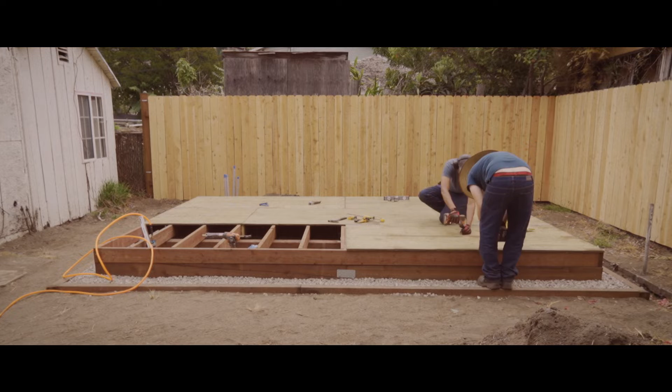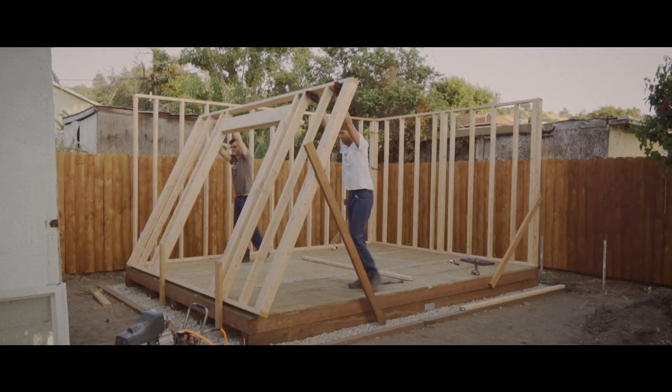In this part of the series, we're going to be building the walls of the shed. Our 12 by 16 shed is going to consist of two shorter walls in the back and front that are 12 feet long, and two longer 16 feet long walls on the sides.

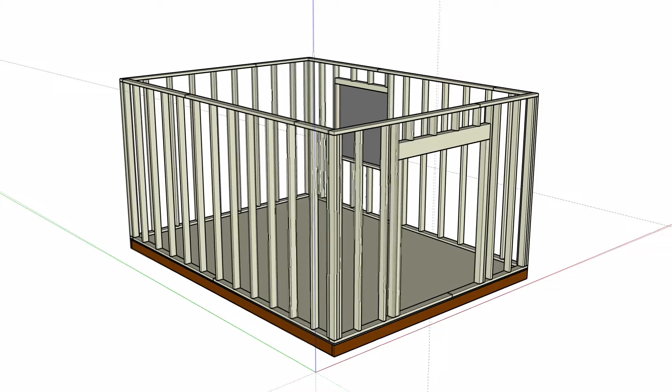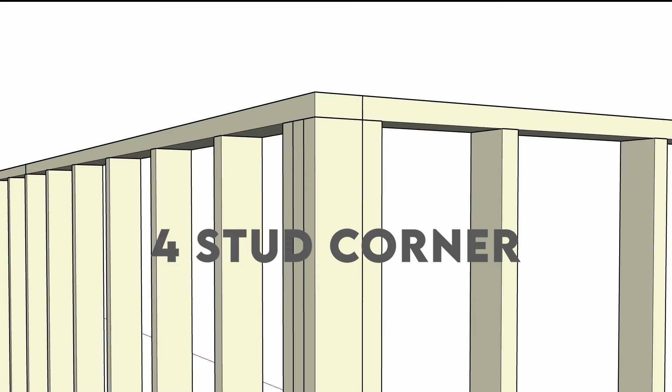We started with the back wall, and with both the back and the front wall, we are going to be stacking three 2x4s together at the start and end of the wall to create what is called a 4-stud corner, because when the two walls come together, the 3 studs from the back wall and the 1 stud from the side wall makes 4 studs. This allows for more surface area to attach the corners, as well as providing support on the inside corner for drywall mounting.

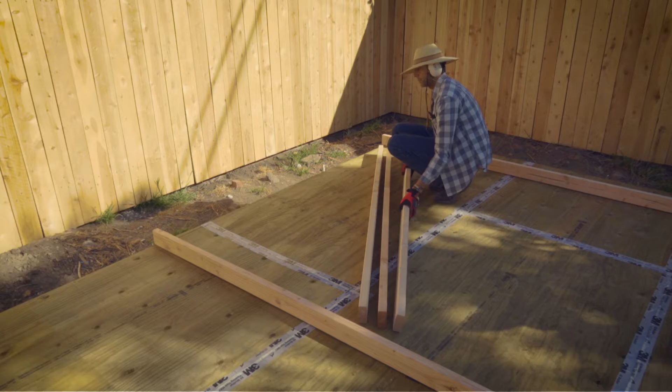There are many different solutions to handling corners, including a method known as the California corner that uses only 3 studs per corner, but it was only a few extra dollars in lumber to do it this way, and it kept things nice and easy, and since this is our first time framing something so large, we wanted to keep it as easy as possible.

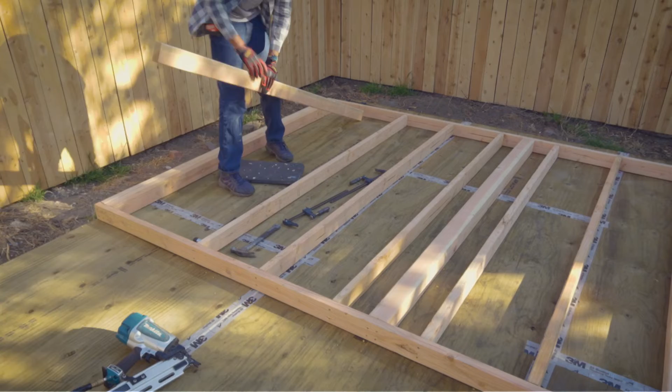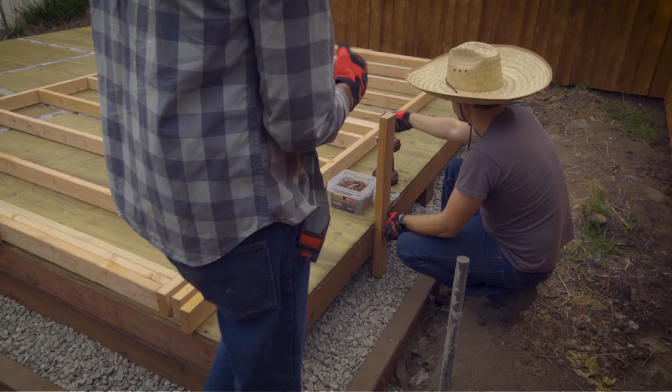We built the walls on the floor and raised them into place. In order to prevent the wall from slipping off the subfloor, we added a couple blocks to keep everything in place.

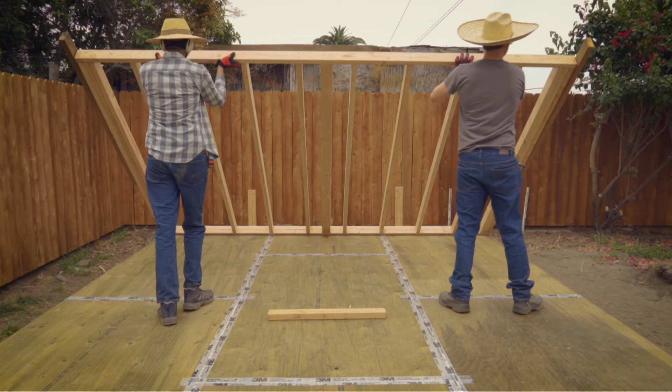We also added a couple of scraps on the sides of the wall to act as braces that will be temporarily screwed into the sides of the flooring system just to hold it all in place while we work. Just a little adjusting to get it all plumbed up with the floor, and we were good to go.

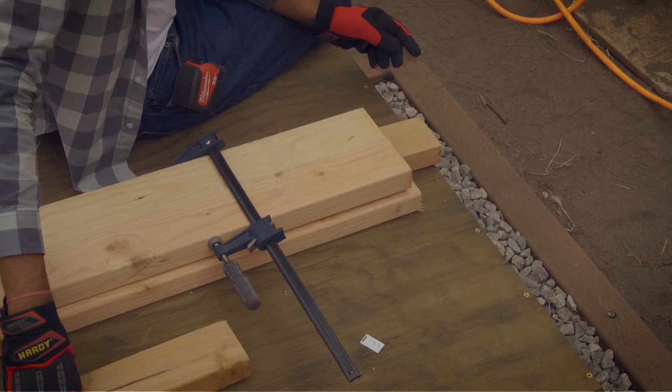We found it easiest to mark the stud layout before assembling the walls, so I just placed the top and bottom plate next to each other and marked them together. For the side wall, I placed a 2x4 scrap on its face at the start of the run to act as a placeholder for the stud of the back wall that this wall will be attached to, and used that as my starting point to measure 16 on center across the span of the top and bottom plate.

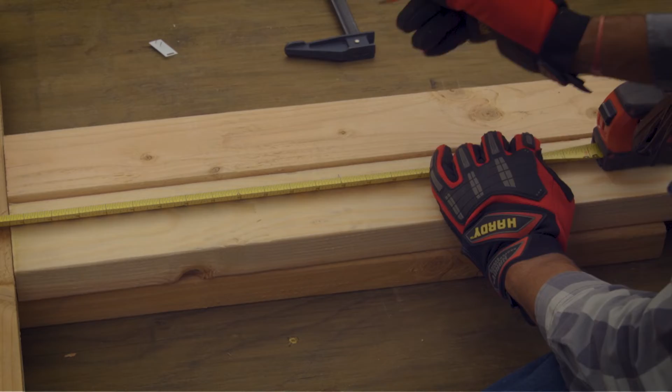Most tape measures will have marks for 16 on center, which makes it easy to just spread it across the boards and mark every 16 inches. Then I just measured 3/4 of an inch on either side of my mark and drew a line down. This will be where the stud should land.

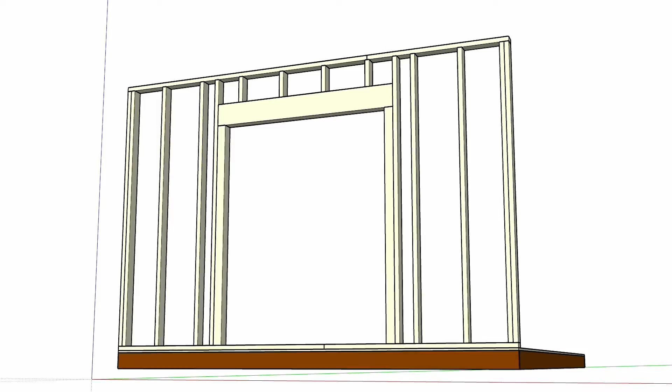The front wall includes a large opening for the doors that I'll be making, so we built a header out of 2x6s to carry the load around the door opening. Unfortunately, the added weight of the header did make this wall much harder to lift into place.

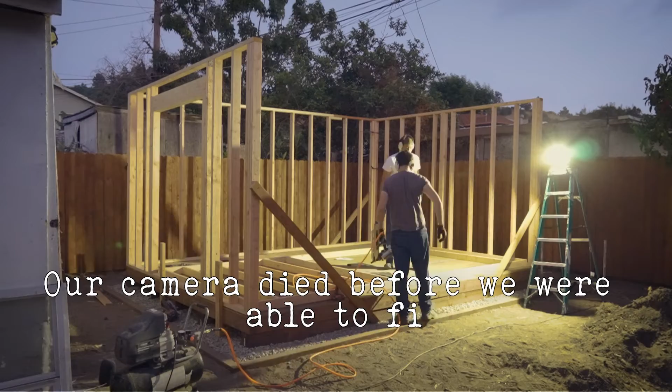Once all 4 walls were up, we worked on the double top plate. The shed is going to have an additional layer of 2x4s stacked on top of the top plate that will overlap the joints at the corners for greater stability.

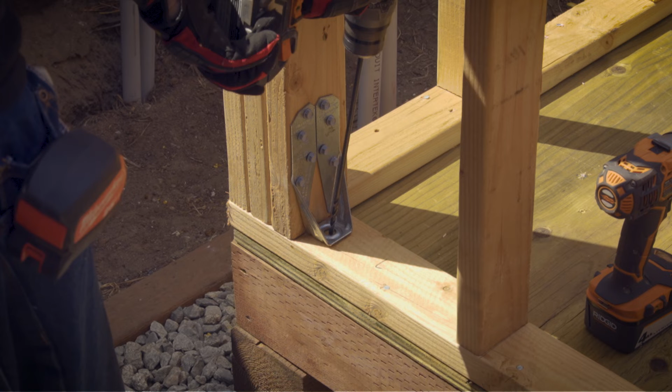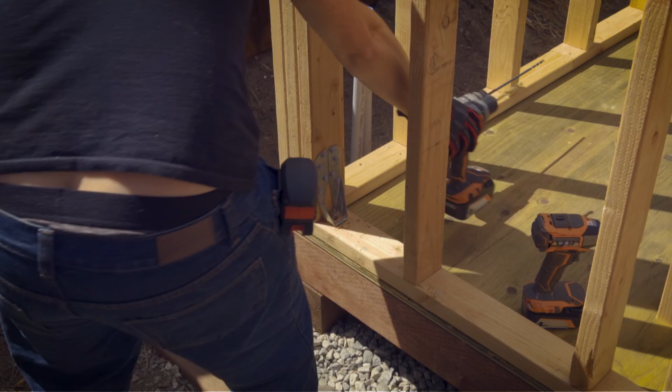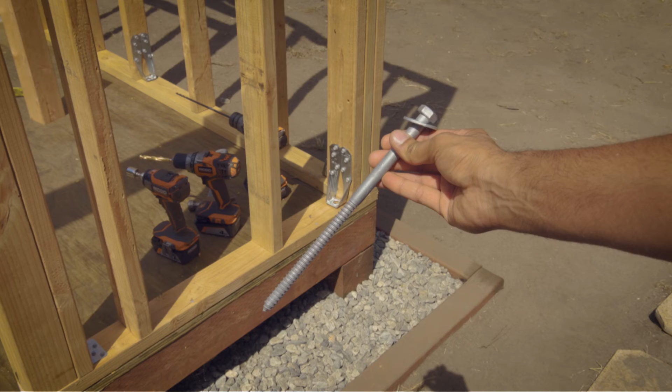We also added these Simpson hold-down brackets to the bottom corners that connect the walls all the way down to the skid foundation blocks using this really long and beefy bolt. This should hold the structure in place, hopefully protecting against wind uplift and preventing it from ever sliding off the skids.

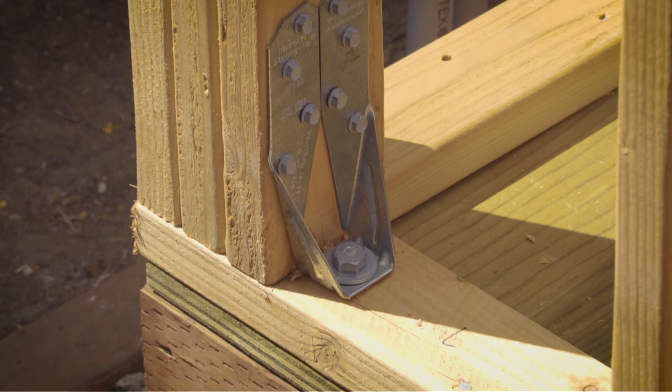And with that, we finally have the beginnings of a building.